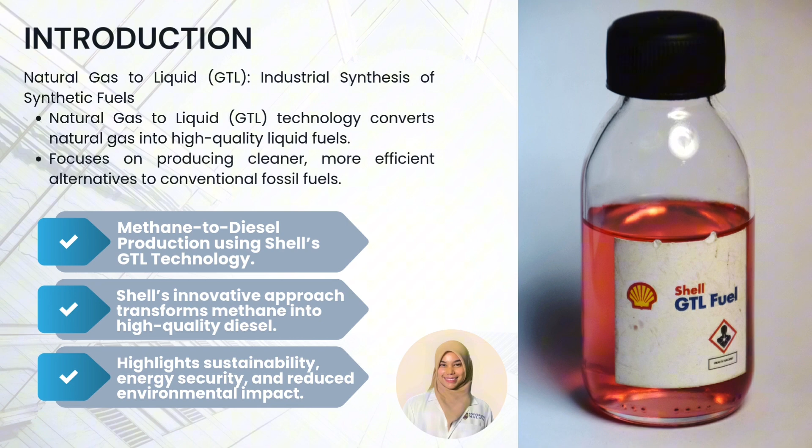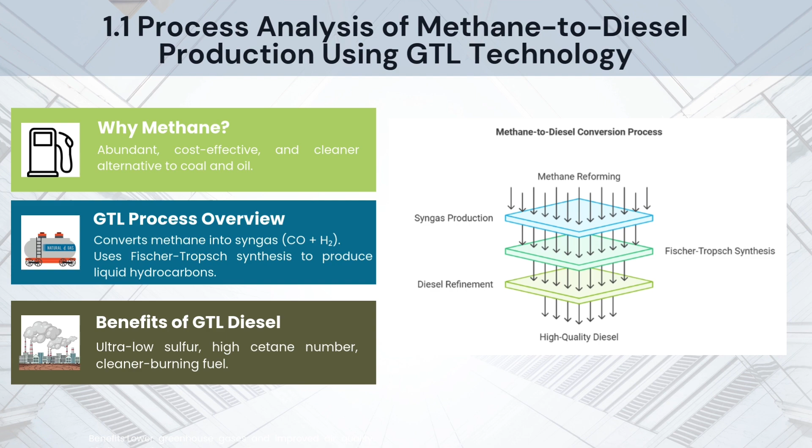I am Farisha Nurjana, and today we delve into the transformative potential of natural gas to liquid technology. Shell leads the industry by converting methane into high-quality diesel, addressing energy security, reducing emissions, and minimizing methane flaring. Methane, the simplest hydrocarbon, is abundant, cost-effective, and a cleaner burning fuel. Through GTL technology, methane can be converted into high-quality diesel and other hydrocarbons. This process addresses energy demands while reducing natural gas waste. The resulting GTL diesel stands out for its ultra-low sulfur content and high cetane number, offering cleaner combustion and compatibility with modern engines. The process begins with syngas production.

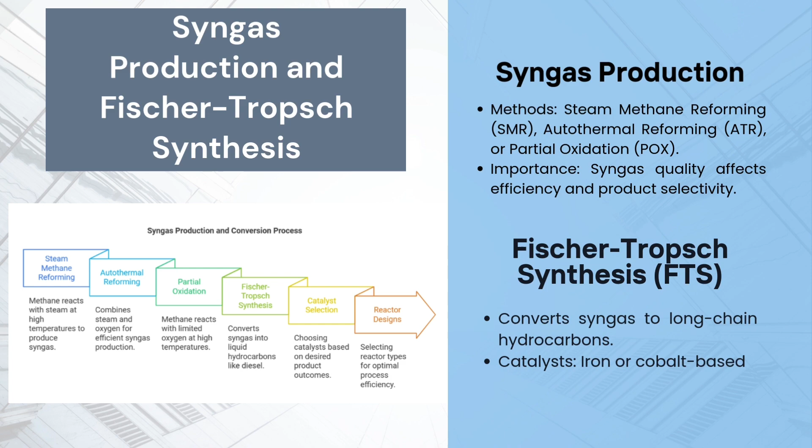Methane is reformed using methods like steam methane reforming or partial oxidation. Syngas, a mix of carbon monoxide and hydrogen, is essential for efficiency. Fischer-Tropsch synthesis then converts syngas into long-chain hydrocarbons using iron or cobalt catalysts. This step is the heart of GTL technology, where it enables methane to diesel transformation. Finally, hydrocracking refines raw hydrocarbons into high-quality diesel. This process enhances fuel properties and ensures compliance with environmental standards.

Shell's Pearl GTL plant in Qatar demonstrates the scalability of this technology, while in Malaysia, Shell's expertise in gas processing positions the country as a potential hub for future GTL projects, aligning with sustainability goals.

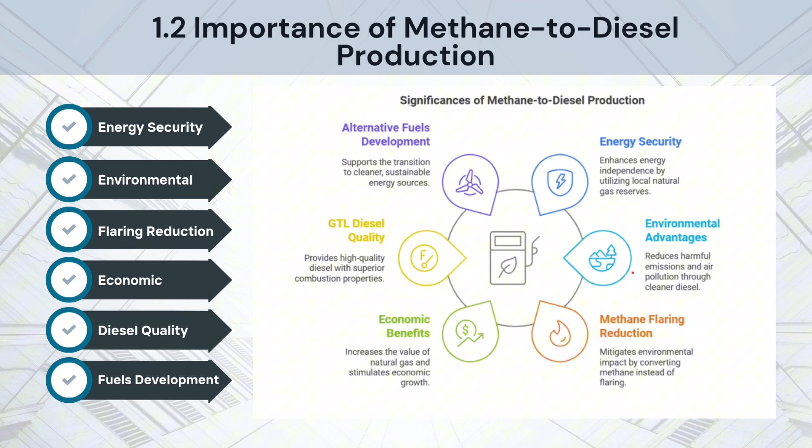Next, we move on to 1.2, the importance of methane to diesel production. Converting methane to diesel through GTL technology addresses critical energy and environmental challenges. It enhances energy security by enabling countries to produce diesel locally, reducing reliance on crude oil imports. GTL diesel is cleaner, resulting in reduced emission of harmful pollutants like sulfur oxides and nitrogen oxides. Additionally, it minimizes methane flaring, a major source of greenhouse gases. Economically, the GTL process supports local economies by creating jobs and stimulating growth in natural gas-rich regions. It enhances engine performance, reduces maintenance costs, and increases fuel efficiency, offering long-term benefits for industry and consumers alike.

Lastly, in part 1.3, we explore plasma activation, an innovative method for methane to diesel conversion. This breakthrough technology operates under low temperatures, generating reactive intermediates like methyl radicals. It reduces energy use, lowers costs, and enhances sustainability. Combined with catalysts, it revolutionizes methane to diesel production for a cleaner future.

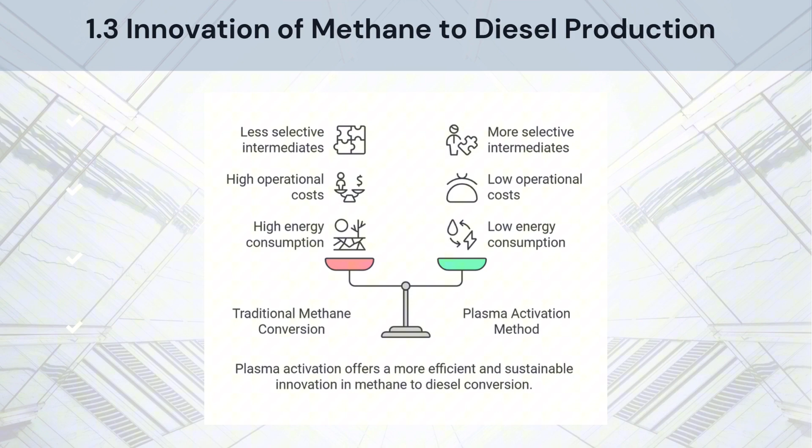Good day everyone, I'm Chen Gavin. Firstly, I will talk about Shell's strong commitment to corporate social responsibility, focusing on their gas-to-liquids plants in Malaysia and Qatar. Let's look at environmental responsibility.

Shell's GTL plant produces cleaner fuels with fewer emissions than traditional fuels, reducing air pollution and harmful emissions. The Shell GTL plant in Malaysia uses energy-saving technologies and recycles water. The Pearl GTL plant in Qatar reduces freshwater use with advanced water recycling and eliminates methane flaring, helping protect the environment.

For economic responsibility, in Malaysia Shell employs 400 staff, of which 89% are local Sarawakians, boosting local jobs and business. The Pearl GTL plant in Qatar strengthened the economy by converting natural gas into valuable products, reducing reliance on crude oil and supporting 52,000 workers during construction.

For its social responsibility, Shell GTL plants prioritize community development. In Malaysia, Shell offers training programs like welding courses to help locals gain industry skills. In Qatar, the Pearl GTL plant provides workers with healthcare, recreation, and a sense of well-being through Pearl Village.

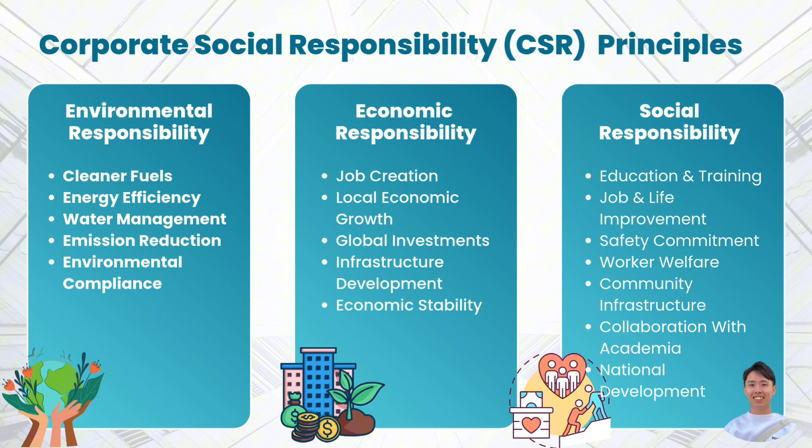Next, looking at ESG factors. Shell MDS Malaysia integrates ESG considerations into its operations, ensuring that its processes meet environmental rules and contribute positively to the local community. Socially, Shell is focused on creating jobs for local people and maintaining open communication with the community to build trust. In terms of governance, Shell adheres to clear ethical rules, working closely with the government and local groups to ensure responsible decision-making.

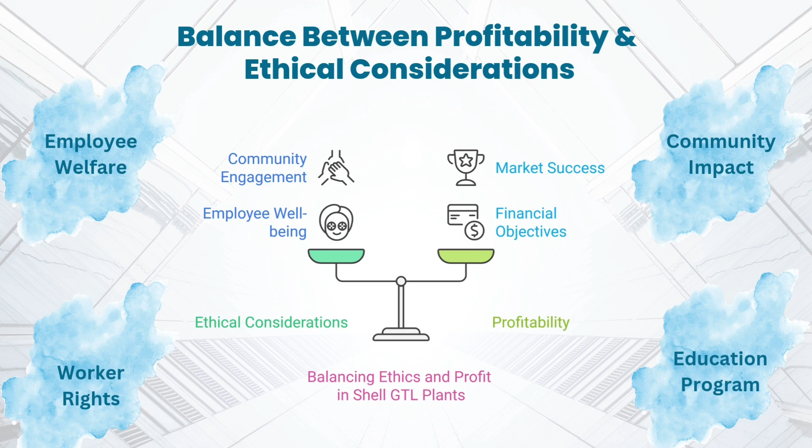Next, Shell GTL plants emphasize the importance of balancing financial goals with ethical practices, particularly through employee welfare. The company ensures fair pay, safe working conditions, and strong adherence to human rights frameworks. This approach aligns with the United Nations Guiding Principles on Business and Human Rights, ensuring that Shell GTL plant operations respect employee dignity and promote fair business practices.

Shell's operations also align with several United Nations Sustainable Development Goals and the 12th Malaysia Plan. For instance, SDG 6, clean water and sanitation, is supported by the company's emphasis on water efficiency and sustainable water management practices.

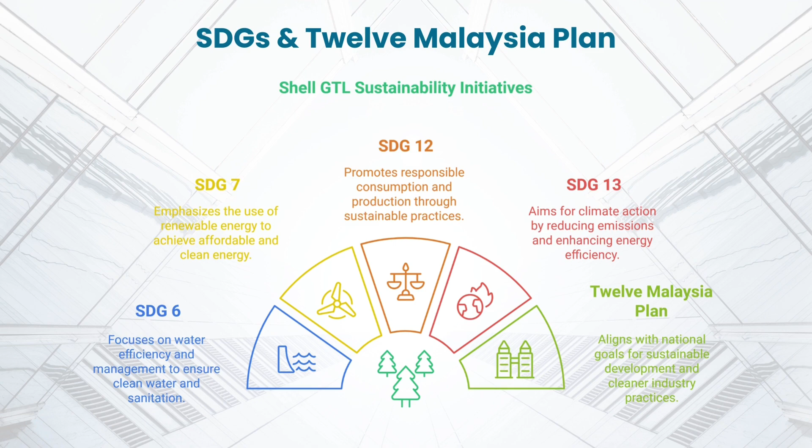SDG 7, affordable and clean energy, is advanced by Shell's efforts to reduce energy consumption and use renewable energy sources. SDG 12, responsible consumption and production, is achieved through Shell's production of cleaner fuels that reduce emissions. SDG 13, climate action, is supported by Shell's reduction of methane gas emissions and commitment to achieving net zero emissions by 2050. The 12 Malaysia plan aligns with national goals for sustainable development and cleaner industry practices.

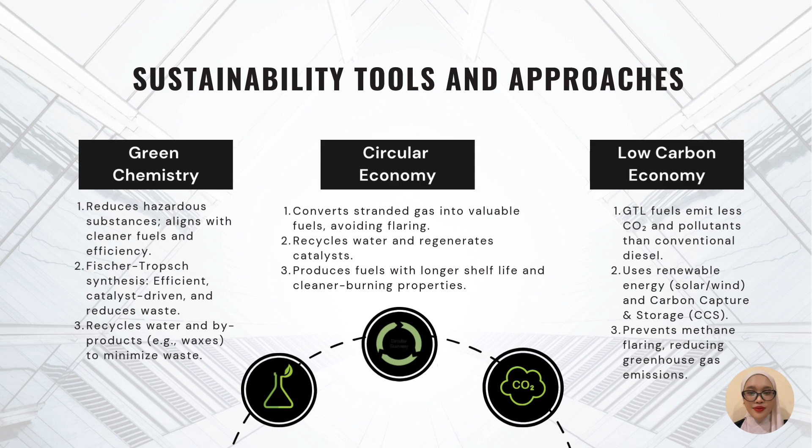Lastly, the low carbon economy. It is basically GTL fuels that emit less carbon dioxide and pollutants than conventional diesel. It uses renewable energy, for example solar or wind, and carbon capture and storage, or CCS, to prevent methane flaring and reduce greenhouse gas emissions.

Now for environmental impact and mitigations. The GTL process, while innovative, has environmental impacts. It is energy intensive and produces carbon dioxide emissions. It also uses significant water resources, which can strain local supplies, especially in arid regions.

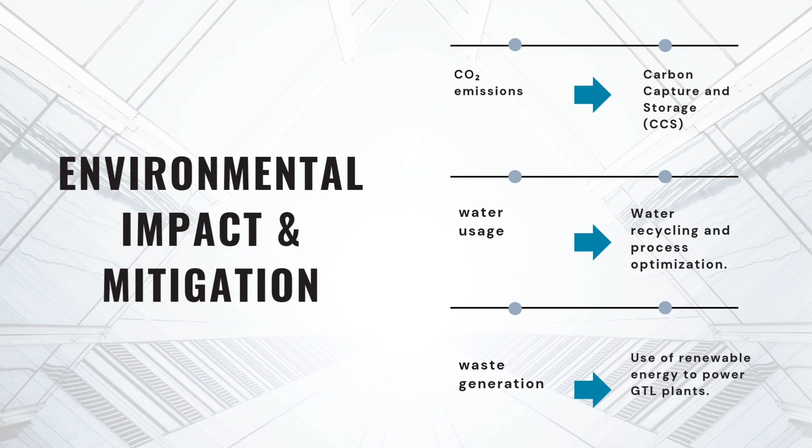To mitigate this impact, Shell employs several strategies: carbon capture and storage, or CCS technology, to capture carbon dioxide emissions, while renewable energy sources reduce dependency on fossil fuels. Next, water produced during Fischer-Tropsch synthesis is recycled, minimizing external water use. Lastly, process optimization reduces waste, and byproducts like wax are repurposed, turning potential waste into valuable resources. This practice ensures a balance between innovation and sustainability.

Now for the last part, life cycle assessment, or LCA. First is scope. LCA evaluates environmental impacts from a product's cradle to grave. For Shell's GTL technology, the goal is to produce cleaner fuels while optimizing resource use and reducing emissions. The scope spans natural gas extraction to the end use of GTL diesel in engines. This comprehensive approach ensures Shell's processes align with sustainability goals.

Next is the inventory. The inventory stage of LCA quantifies inputs like energy, water, and materials, and outputs such as emissions and waste. For example, during syngas production, natural gas and oxygen are inputs, while outputs include carbon dioxide, syngas, and heat. At every stage, from extraction to refining, inputs and outputs are meticulously tracked to identify improvements. This data is crucial in refining operations at Shell's GTL plants.

The third part is impact assessment. It evaluates the environmental and human health effects of the GTL processes. The GTL process actually reduces greenhouse gas and particulate emissions compared to conventional diesel, improving air quality. However, the process's high water use poses challenges. By understanding these impacts, Shell identifies areas for improvement, like enhancing water recycling and integrating renewable energy.

And lastly, the interpretation stage translates LCA results into actionable insights. For example, recommendations from Shell's Bintulu plant LCA led to better water recycling and energy efficiency at the GTL plant. This stage ensures that GTL operations continue to align with sustainability goals, making the process both innovative and environmentally responsible. That's all from my part.

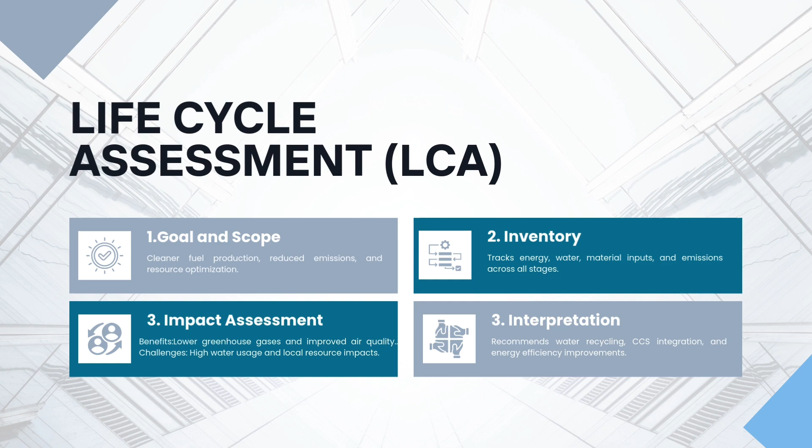Today, I will take you through the journey of transforming methane into clean burning diesel, from laboratory research to commercial production. This process begins with fundamental experiments, progresses through bench and pilot scale-up, and ends with industrial production of high-quality diesel. Scaling up methane to diesel production involves challenges in reactor design, requiring precise control over temperature, pressure, and material durability. Process optimization is key, as variations in syngas composition can affect efficiency. Maintaining product quality is also difficult due to catalyst degradation and byproduct formation.

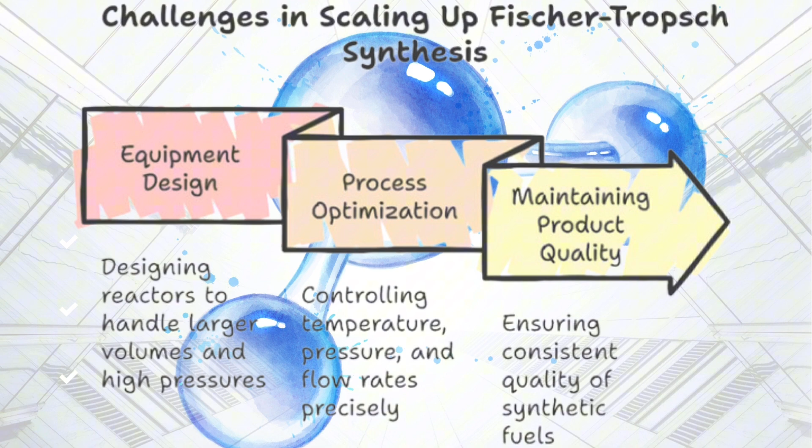EHS considerations are crucial in scaling up Fischer-Tropsch synthesis. Strategies like CO2 recycling and energy efficiency help mitigate CO2 emissions.

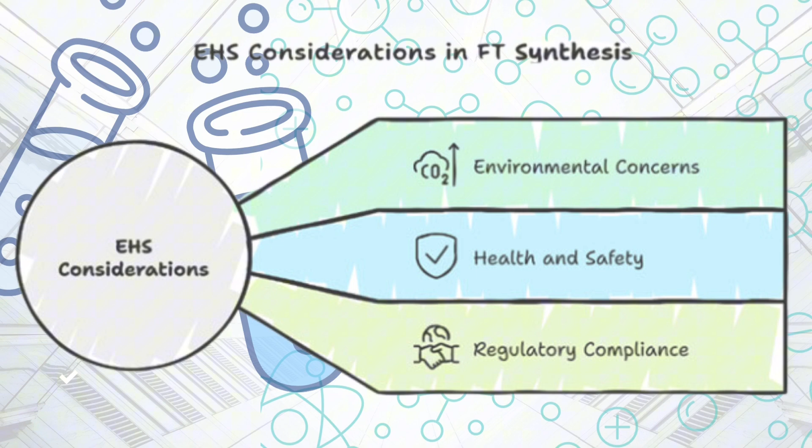Health and safety protocols manage risk from high pressures, temperatures, and flammable gas, where regulatory compliance ensures alignment with climate goals. Shell's GTL technology exemplifies this journey.

Starting in the laboratory with cobalt-based catalysts under low temperature Fischer-Tropsch conditions, Shell successfully scaled operations through bench-scale reactors and pilot plants. The commercial-scale Bintulu GTL plant, operational since 1993, produced 12.5 thousand barrels per day.

By 2011, the Pearl GTL plant in Qatar became the world's largest GTL facility, producing 140,000 barrels per day, demonstrating the scalability and efficiency of the technology.

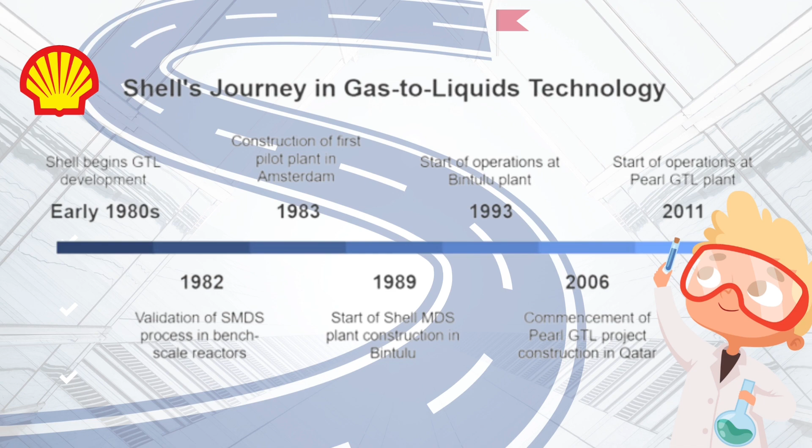Scaling up to Pearl GTL involved overcoming challenges like ensuring uniform gas flow and thermal management in Bintulu's 26,000 tube reactors. At Pearl GTL, reactors were scaled 3.5 times, with automation boosting productivity.

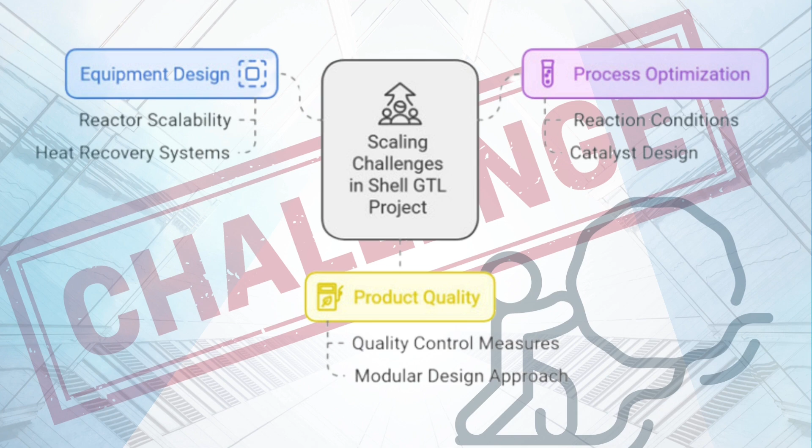Quality control and real-time monitoring ensure ultra-clean fuel production while minimizing methane and CO2 byproducts. Shell focused on environmental and safety measures during GTL scaling.

The Pearl GTL plant achieved 95% carbon efficiency, with methane slip and CO2 formation kept at 1% and 2%. Waste heat recovery and flare reductions minimize emissions, while safety protocols ensure efficiency and safe operations for workers and the environment.

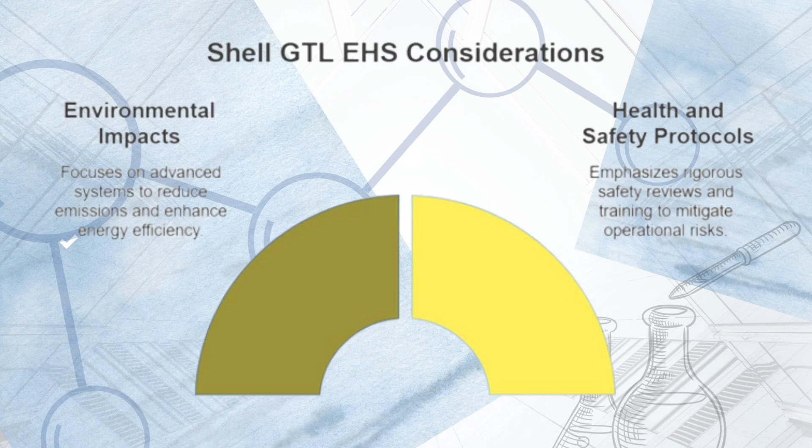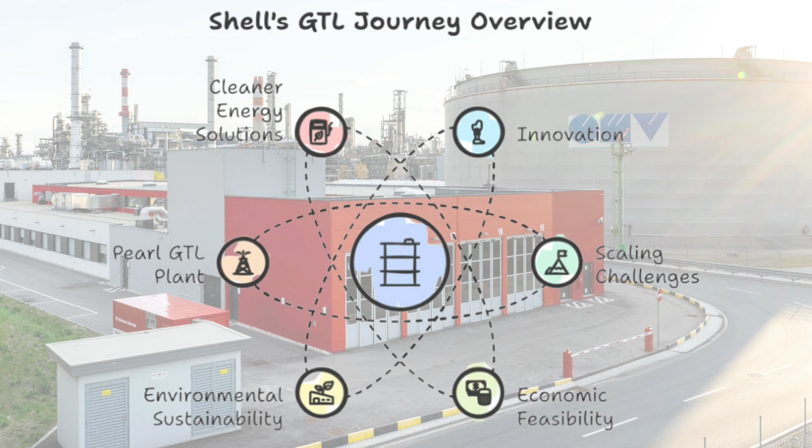In summary, Shell's GTL journey from lab research to the Pearl GTL plant demonstrates groundbreaking innovations. The Pearl GTL plant remains the largest and most advanced globally, producing ultra-clean fuels and setting a global benchmark for sustainable energy production, positioning GTL as a key solution for cleaner energy.

Now I would like to continue for AI implementation for the product risk assessment. Our group has chosen EPI Suite as the suitable computerized predictive tool, as it has many advantages that make it versatile and interesting to explore.

For the background of this tool, it actually has 13 standalone programs that can predict multiple properties and estimation of the product behavior in the environment, such as boiling point, partition coefficient, bioaccumulation factor, and so on.

Next, it also has integration of other AI tool models, which is ECOSAR, that has been covered in the class to predict the aquatic toxicology assessment.

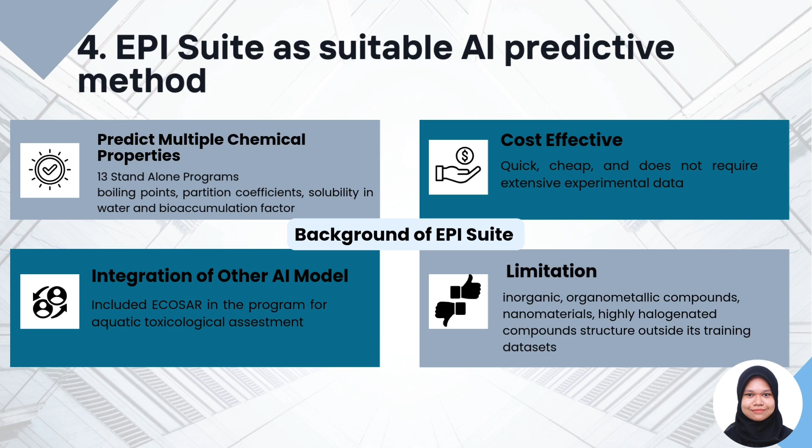For point number 3, it is a cost-effective tool since it promotes quick results and doesn't require extensive experimental data. Lastly, we must acknowledge its limitation, which is that it cannot predict compounds in the category of inorganic, organometallic, nanomaterial, highly halogenated compound structures outside its training dataset.

We have done the simulation using the software and summarized the predicted results in the report. We were only focusing on 4 chemical components in GTL diesel for the assessment, which is octane, hexacosane, 2-methyltetradecane, and 5-propyltridecane. Here is the summary of 2 types of results, which is fugacity modeling and the biodegradability using BioWin3.

It is found that for fugacity modeling, the most persistent compound in water is 5-propyltridecane, and secondly for air is octane, and thirdly for soil is 2-methyltetradecane. For BioWin3, all the compounds take weeks to biodegrade, which is considered slow and increases the ecological risk.

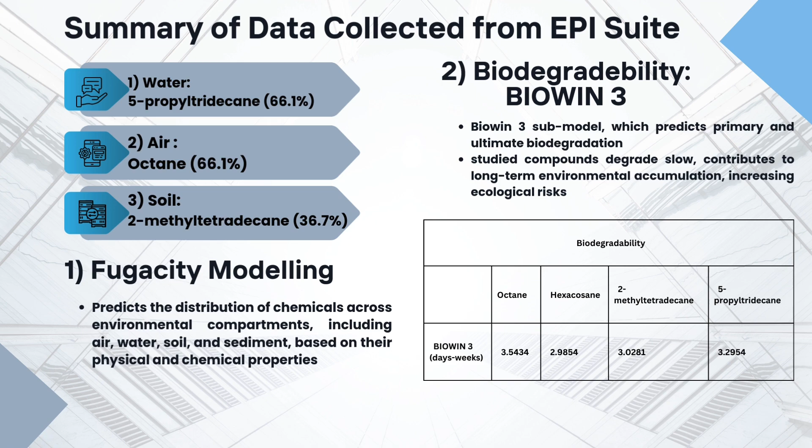For the result interpretation for environmental impact, the water fugacity modeling tells us that the hydrocarbons partition majorly into water and increase the likelihood of environmental contamination.

For the biodegradability result, it is found that all the compounds actually have a long half-life and do not biodegrade easily. This raises the concern of toxic metabolite problems that endanger aquatic species.

For human context, the fugacity modeling of air tells us that humans who are excessively exposed by inhalation of this hydrocarbon can have problems like central nervous system depression, dizziness, and respiratory irritation.

For biodegradability results, humans who are prolongedly involved with this hydrocarbon will have the risk of hormonal disruption, organ toxicity, and also neurotoxicity. I want to highlight that this is only a summary of 2 results out of 7, and you can always refer to our full report for the others.

Good day everyone. I'll be discussing the economic analysis of Shell's gas-to-liquid operation. The first step is market study, focusing on demand, competition, and pricing trends.

Shell's Pearl GTL in Qatar and Bintulu plant in Malaysia position it as a market leader. The rising demand for cleaner fuels and the need to use stranded gas make GTL diesel attractive, but its pricing depends heavily on changes in crude oil prices.

Next is process design. Shell uses Fischer-Tropsch technology to convert natural gas into high-quality fuels. With large-scale plants like Pearl GTL and interest in modular technologies, Shell focuses on efficiency, but high capital investment demands careful economic planning.

In terms of cost estimation, we need to calculate both capital expenditures (CapEx) and operating expenses (OpEx). Shell's GTL CapEx increased by approximately 5.7% from 2022 to 2023, reflecting ongoing investment in plant expansion and technology adoption.

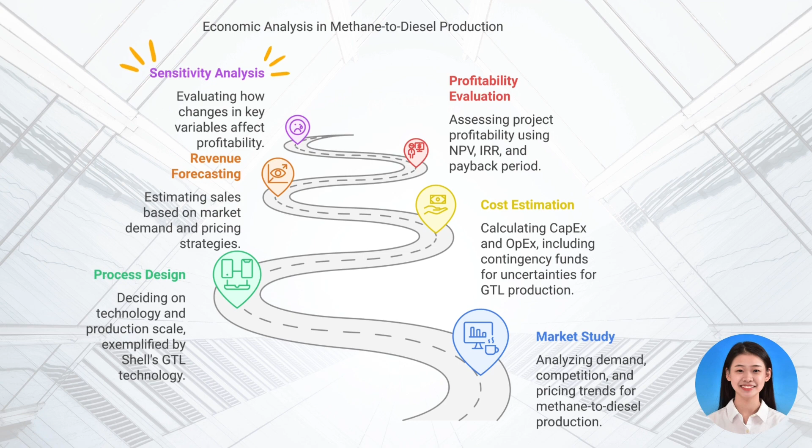Finally, sensitivity analysis assesses how key variables impact profitability. Factors like natural gas prices, product pricing, operational efficiency, and financial costs can all influence Shell's bottom line.

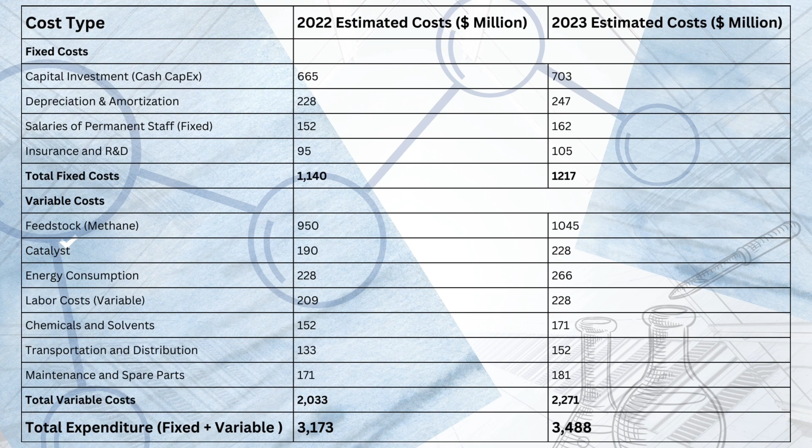This table outlines Shell GTL costs for 2022 and 2023. Fixed costs, including infrastructure and salaries, rose from 1,140 million to 1,217 million due to capital investments and inflation. Variable costs, higher due to production demands, grew with maintenance, feedstock, energy, and logistics. GTL's resource-intensive nature drives variable costs with production, while fixed costs remain stable.

Strong supply chain management ensures consistent feedstock and efficient product distribution. Shell also prioritizes safety, environmental protocols, and workforce training to maintain excellence and minimize risk.

Next, patents to protect Shell's innovative technologies. With over 3,500 GTL-related patents, including proprietary catalyst and process designs, Shell secures a competitive advantage and generates revenue through licensing. For example, Shell's cobalt-based catalysts improve efficiency and stability in Fischer-Tropsch synthesis, essential for large-scale GTL production.

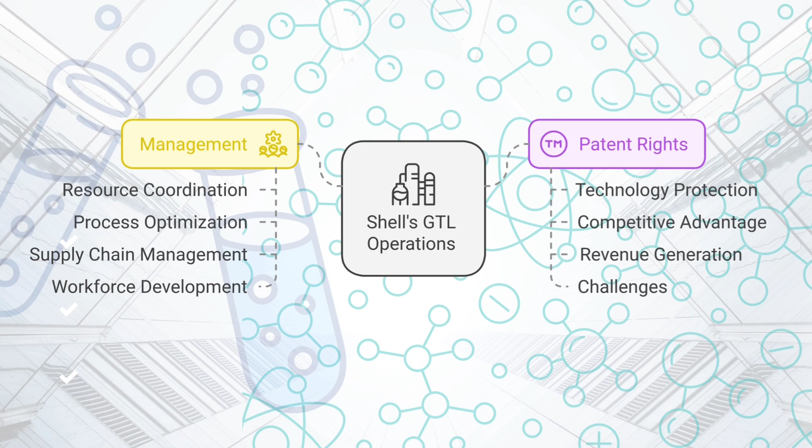However, managing patents has challenges. These include high R&D costs, expiration of patents, and the risk of counterfeit technologies. Shell mitigates these risks by monitoring global patent use, enforcing rights, and collaborating on new technologies while protecting its intellectual property.

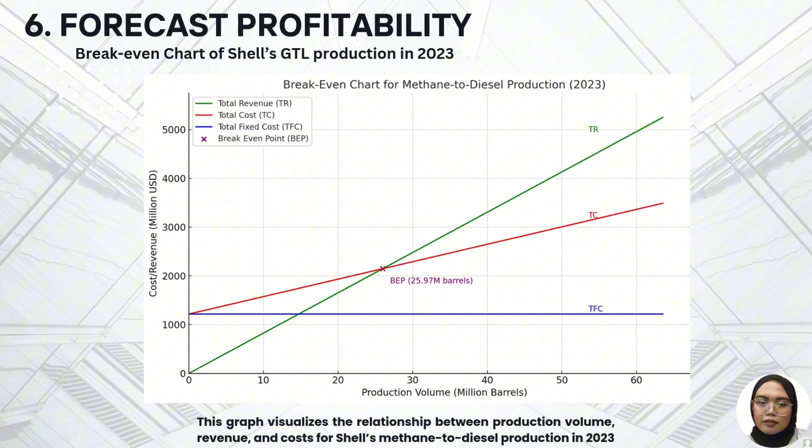Continuing the economic analysis that was explained by my friend from the previous slide, let me get you through the break-even chart analysis for Shell's gas-to-diesel production in 2023. Generally, this graph visualizes the relationship between the production volume, revenue, and cost for Shell's gas-to-diesel production. Now, let's go deeper into the chart.

Firstly, the green line represents total revenue, which is denoted as TR, which increases in proportion to production volume. This growth reflects the premium selling price of $82.64 per barrel.

At a production level of 63.51 million barrels per year, total revenue reached 5,248.47 million, while total cost (TC) amounts to 3,488 million, resulting in a net profit of 1,760.47 million. The gap between TR total revenue and TC total cost beyond the break-even point indicates profitability, and in this Shell gas to liquid production, it shows very high profitability, which is very good.

Second, the red line depicts total cost TC, which consists of both fixed and variable costs. It starts at the level of fixed cost and rises steadily as variable cost increases with higher output. The blue horizontal line represents the total fixed cost TFC, which remains constant at 1,217 million regardless of production volume. That means this cost will be constant throughout the production.

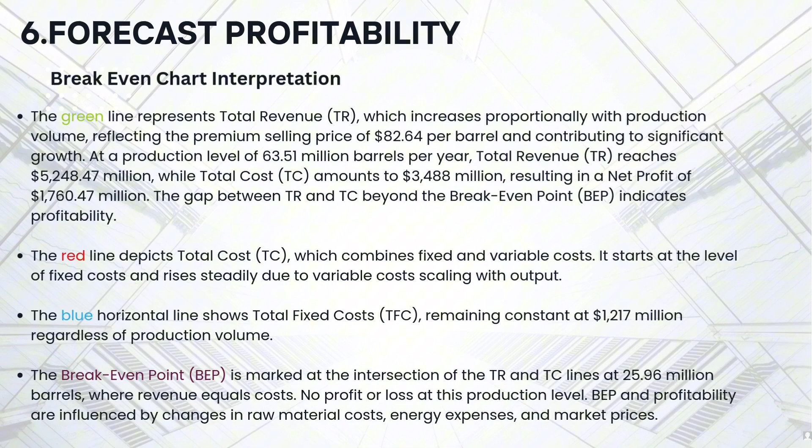And the most important thing, which is the break-even point BEP, as you can see in the graph denoted as X in purple color, is identified at the intersection of the TR total revenue and TC total cost lines, which occurs at 25.96 million barrels. At this point, revenue equals total cost, and there is neither a profit nor a loss. The BEP and overall profitability are influenced by fluctuations.

Now that we have understood the chart, let us discuss the factors that influence the break-even point BEP, as this is a very important point in a business to make sure that the business is always in profit and can smoothly run.

Alright, first, the rising raw material costs, particularly the increasing price of methane, lead to higher variable costs, which in turn raise the BEP. So, to mitigate this, Shell can secure long-term contracts or explore renewable methane sources.

Second, energy costs also play a significant role. High energy input increases production expenses. By adopting renewable energy such as solar or wind power, Shell can reduce the cost and lower the BEP.

Third, market dynamics. This includes the price drops and competition that can affect both the selling price and demand for the product. Expanding into new markets and targeting premium customers can help maintain pricing power and demand. Competition from alternative products may force price reductions, but by emphasizing the superior quality of gas to liquid diesel, Shell can differentiate itself and maintain its market position strongly.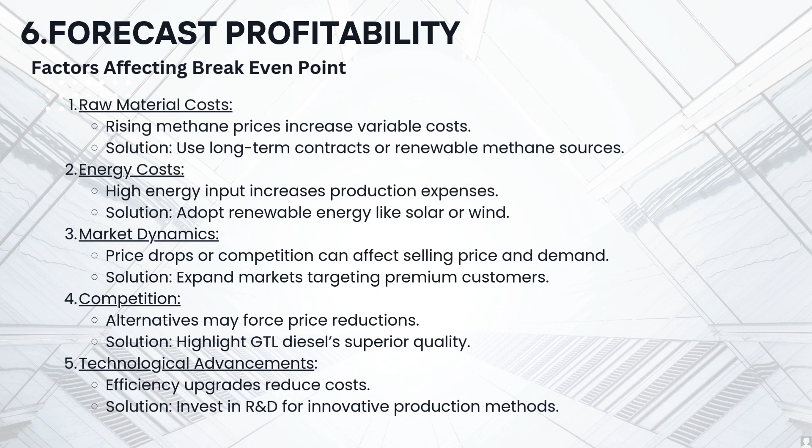And finally, technological advancement in the production process can reduce costs. Investing in research and development R&D to improve efficiency and adopt innovative production methods will help lower the overall cost structure, thus reducing the BEP.